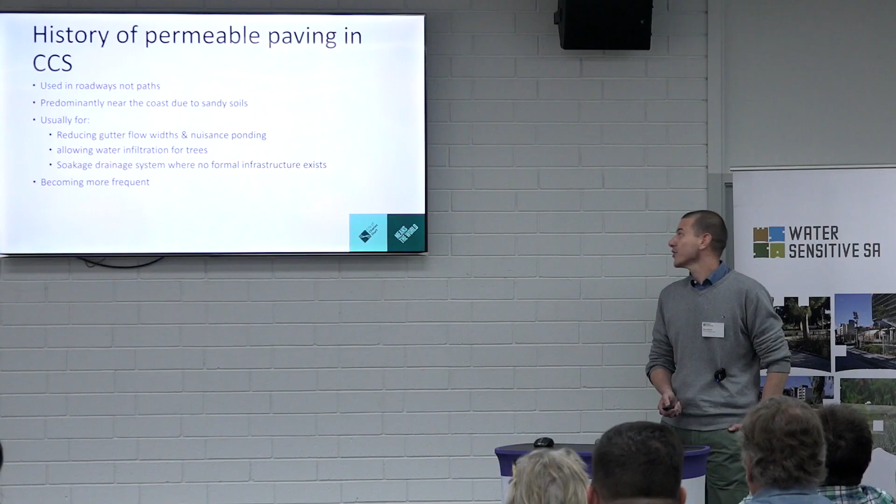I'll give you a brief history of permeable paving in Charles Sturt, where we've been using it for quite a while, though not quite the uptake of Mitcham and West Torrens. It's predominantly used in roadways, not too many in footpaths, and usually near the coast due to the sandy soils. Again, the education and the research that's coming out of Mitcham particularly is starting to sway upper levels of the organisation, but originally there's a bit of that fear about reactive soils.

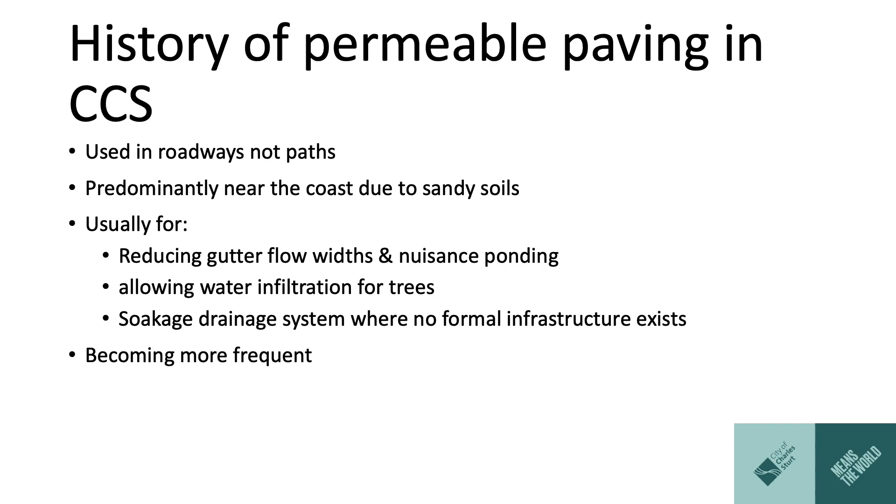It's usually for reducing gutter flow widths, nuisance ponding, maintaining water infiltration for trees when we're formalising laneways or car parks, and soakage systems when formalising laneways where there's no nearby drainage. It is becoming more frequent. We've got about 4 projects next year, some major streetscapes where we're implementing numerous permeable paving treatments, a little bit of a trial, but yeah, just trying to increase the uptake.

So I'll run through a few different examples. This is Kirkcaldy Avenue. This is probably our oldest one. It's about 22 years old, built back in 1999. So this is basically parking bays. The intent was to reduce gutter flow widths and that little bit of ponding in the roadway in smaller rain events without having to extend a stormwater main about 150 metres up the road.

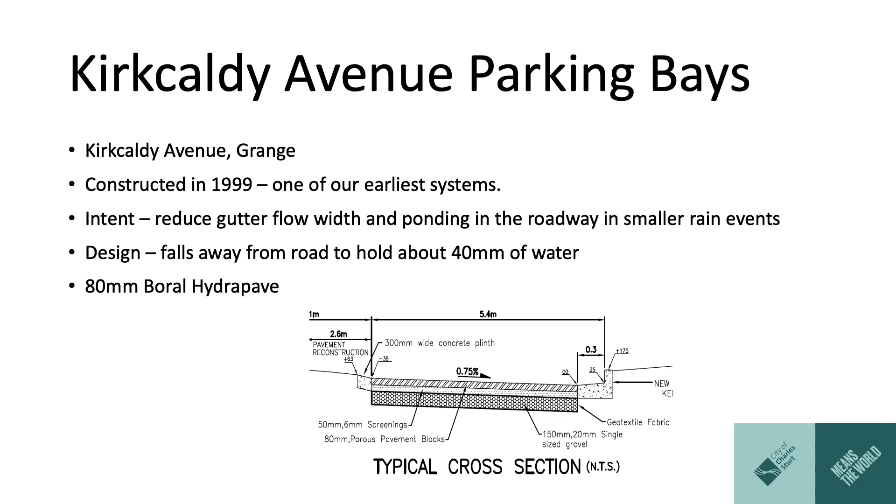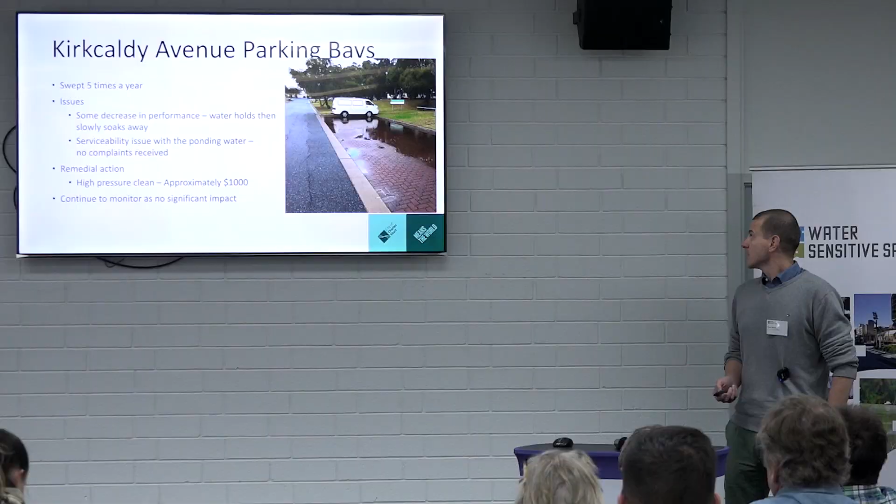The design reflects that. As you can see, it actually falls away from left to right, so away from the road. So it holds about 40 mil of water over the length of the parking bays, and then that slowly soaks in. Any excess in those large rain events carries on down the road. So this is 80 mil Boral Hydrapave on about 150 mil of screenings. For maintenance, it's swept about 5 times a year as part of the general road network.

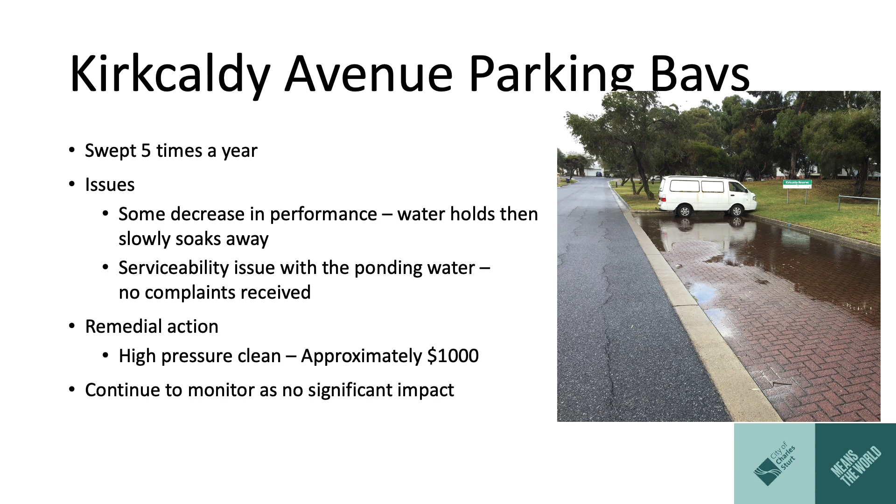Over time, there has been some decrease in performance. Now that's just fairly subjective, based on some council employees noticing a slight difference in how long it takes to soak away. Serviceability-wise, no complaints received, but as you can see in the photo, if someone is parked in the parking bay and it rains, they come back to their car and they do have to contend with about 40 mil of water. So that's something to consider when you're designing these systems: what happens when the water does get held there.

There is a bit of moss build-up in the joints, so we basically just did a high-pressure clean. It's about a day's labour, about $1,000, and we're just continuing to monitor that. So like I said, that's 22 years old, scheduled for renewal in another 10 years, but we'll just monitor it and see what happens.

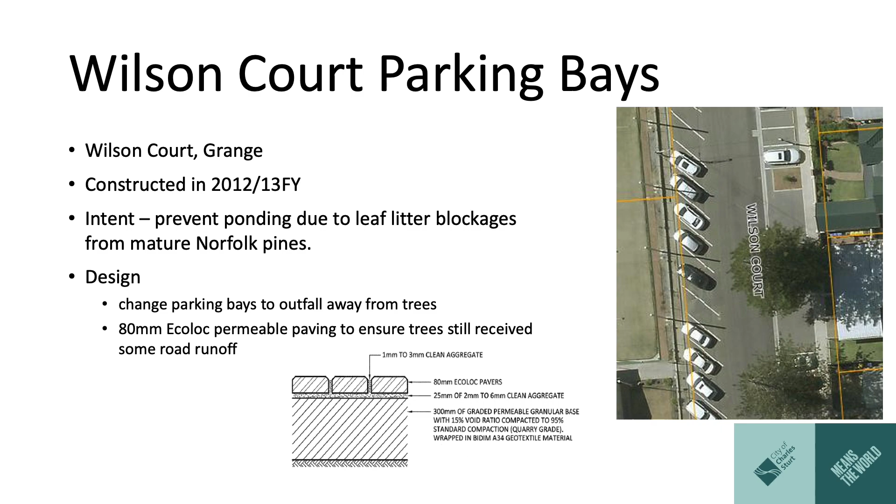Similar thing, Wilson Court. This was constructed in 2012. Basically in the right-hand side of this photo, just along here, is where the curb and gutter previously was. You can see the mature Norfolk pine trees there. With the amount of leaf litter they dropped, there was a lot of blockage of that curb and gutter. So we actually changed it to an outfall. That now falls away to the road, and you can see the new spoon drain just next to Wilson Court there. And we went with permeable to maintain the water infiltration around the structural root zone of the trees.

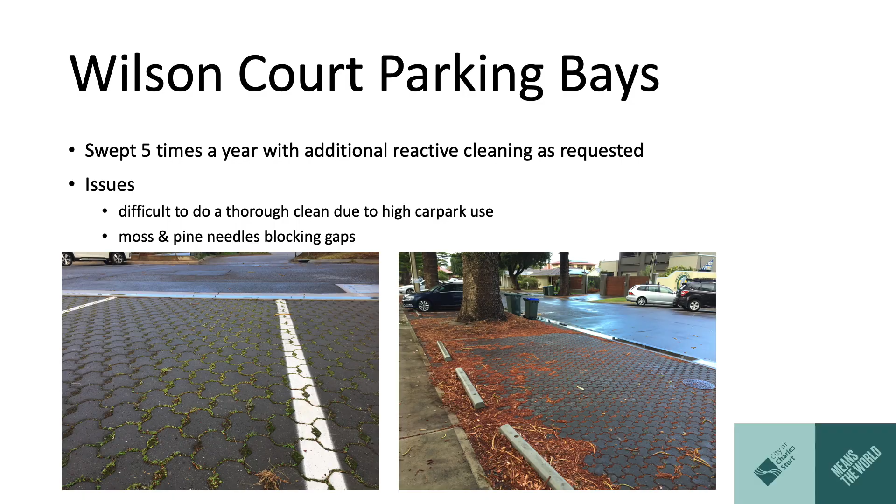They're 80 mil Ecoloc on about 300 mil of screenings, so quite a thick pavement on that one. Again, about 5 times a year sweeping with some additional reactive if people are ringing up. Probably one of the biggest issues we have here is high car park usage at all times. It's next to the bowling club, it's right near a school, so it's busy pretty much all day, every day, not quite 24/7, but very, very busy. So it's very difficult for our street sweeper to get in there and actually do a thorough sweep.

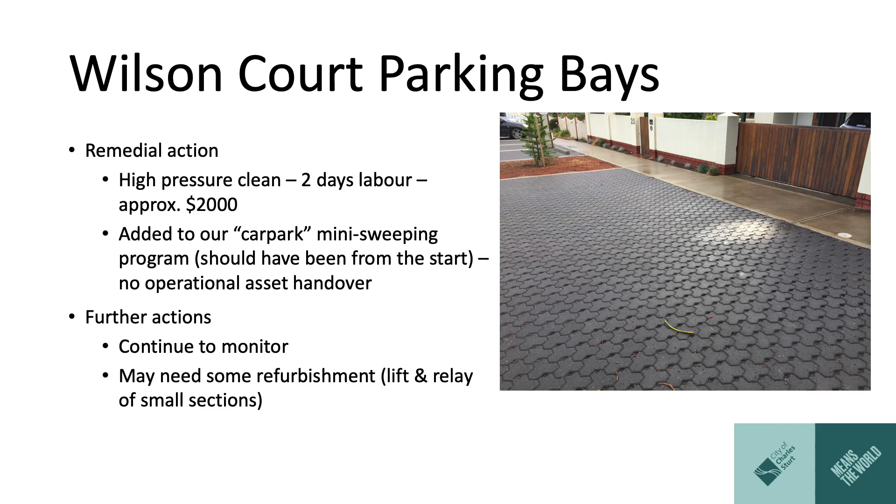There are some areas the residents actually maintain, and you'll see a photo of that soon, but there's moss and a lot of Norfolk pine needles blocking up the gaps just because we can't get in there with the sweeper. So again, we high-pressure cleaned it out. Due to the extent, it was about 2 days. We've added it to our car park mini sweeping program. It should have been from the start, but it didn't get handed over to operations as it should, so there's a learning there. And we just continue to monitor it.

And we've actually had to replace one of the Norfolk pines that collapsed in some wind, so that's a new one there, and it'll benefit and grow quite rapidly. So we'll continue to monitor this, and we may need to do some targeted refurbishment just to lift and relay some sections.

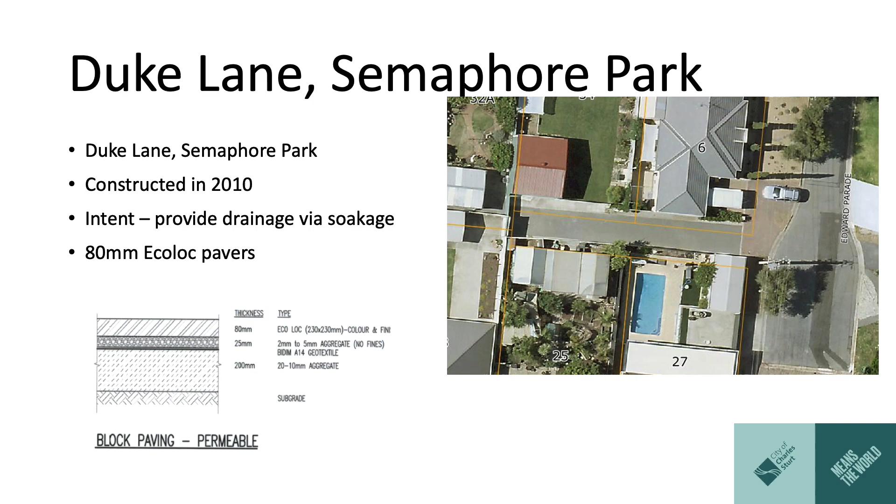Duke Lane, Semaphore Park, 2010. This actually falls away from the right to the left, much like the example that Andrew used. There's no formal drainage within about 300 metres of this. Stormwater from the houses is discharging to the laneway. So the intent here is purely just to provide drainage via soakage. This one is not maintained at all. No one has swept it, looked at it, touched it since 2010.

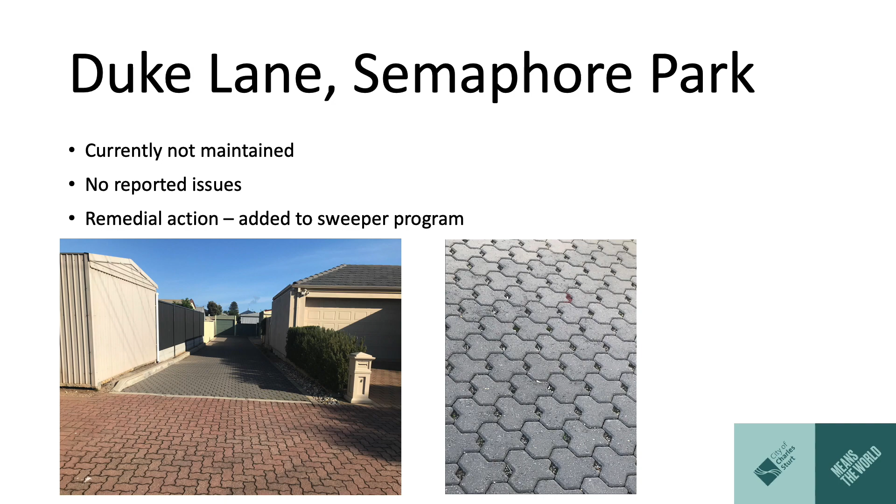Again, asset handover is key. So when we actually went out there and had a look, there were no reported issues, and it is, as you can see in that photo there, functioning fantastically. There's a little bit of moss, but not much. We put that down to there being no overhanging trees, and it does get quite a large vehicle volume. There's about 5 or 6 houses down there that are quite frequent with their car usage. So sometimes you don't have to maintain these assets and you do get lucky.

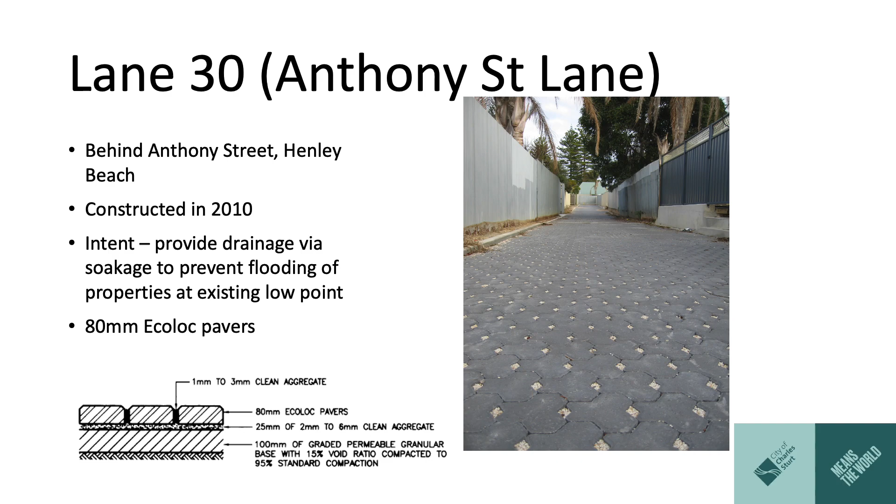Lane 30, Simon's baby. We call it Anthony Street Lane. So this was constructed in 2010. Again, provide drainage for a 1 in 5 event via soakage to prevent flooding of several properties down there. It's 80mm Ecoloc and quite a shallow pavement grading, as you can see. It's a laneway, not a high traffic load, this one.

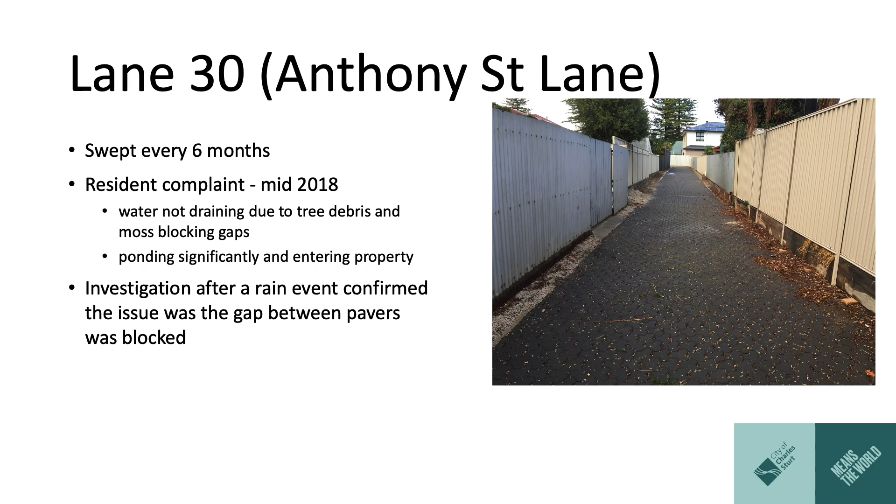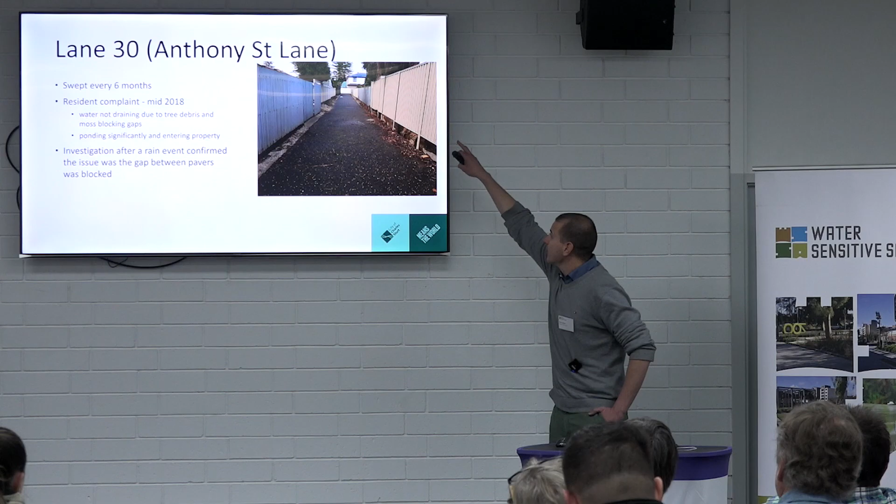That's what it looked like shortly after construction, nice and pristine. Swept every 6 months. Received a resident complaint in mid-2018 that the rear of their yard was being flooded because their water wasn't draining away at the low point, and they suspected it was due to the blockage that you can just see there. There's quite a few large trees that were dropping a lot of leaf litter, including the fine little nuts that were getting into the gaps.

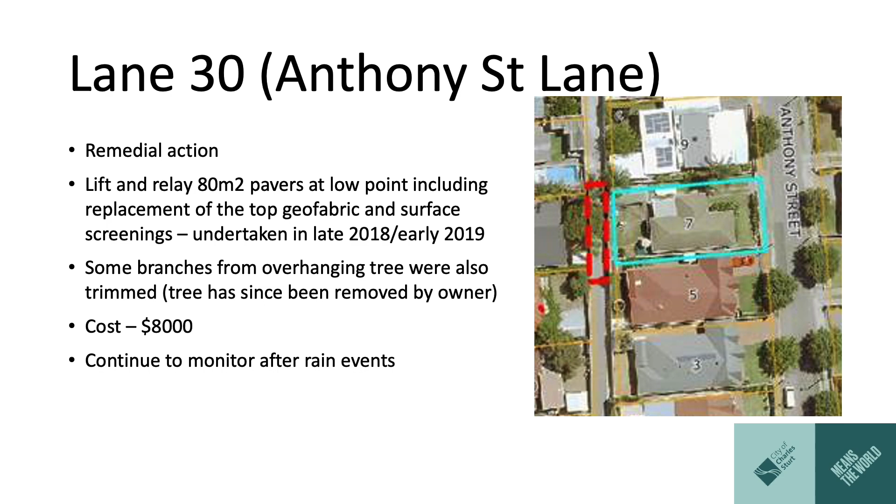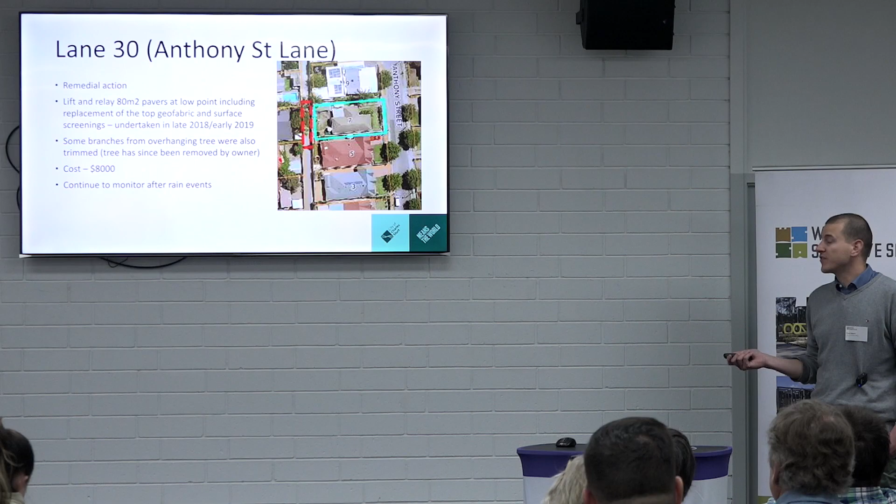Does have the Geofab, so we kept that. Now we know we don't need it, particularly in an environment like this. Over the Geofab, the surface of the 6mm fine filter layer, and trimmed some of the overhanging branches. That tree's since been removed by the owner. That was about $8,000, so it's about $100 a square metre. Probably would have been a little bit less if we had a larger area, but with that small area, you have those costs. We've continued to monitor that, and we haven't had any further issues.

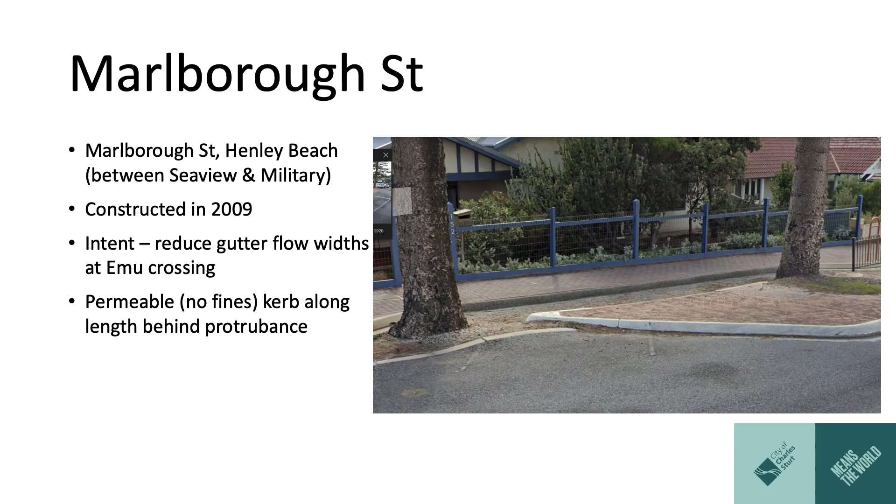Now this isn't permeable paving, but it is something you might consider instead of interlocking pavers. So this is Marlborough Street. It's between Seaview and Military. For those of you who aren't familiar, it collects a lot of water off of Seaview and then falls down to Military Road. We had some quite extreme gutter widths here, about 3 to 4 metres in some fairly minor rain events. So this was constructed in 2009. This is actually the start of an emu crossing there, so when you've got kids and elderly using that, you don't want extreme gutter flow.

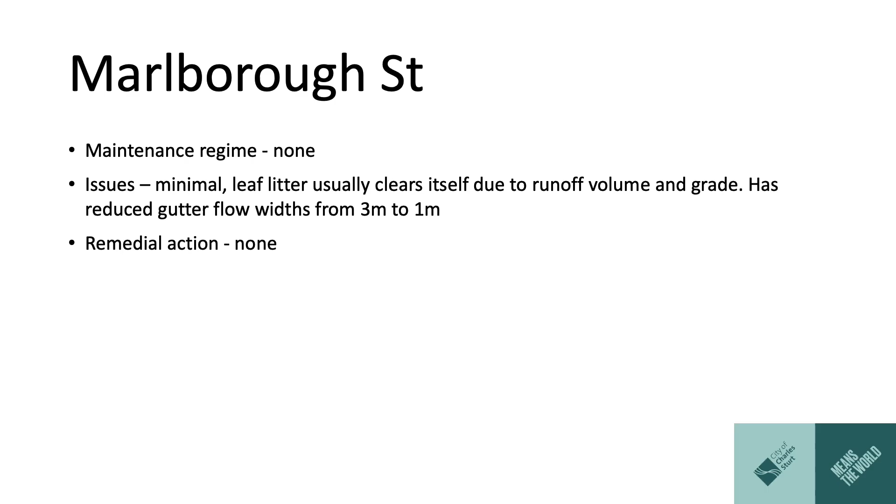So this is permeable curb, no fines curb, constructed the length of the protuberance, and you can see you've got some Norfolk pines there as well. Again, this one, no maintenance. I don't have a recent photo of it, but because of the grade and the runoff volume that it gets, it's very self-cleansing in a rain event, so quite fortunate. And gutter flows are down to about 1 metre there as opposed to 3 metres. So no action taken on that one, but sometimes you do luck out.

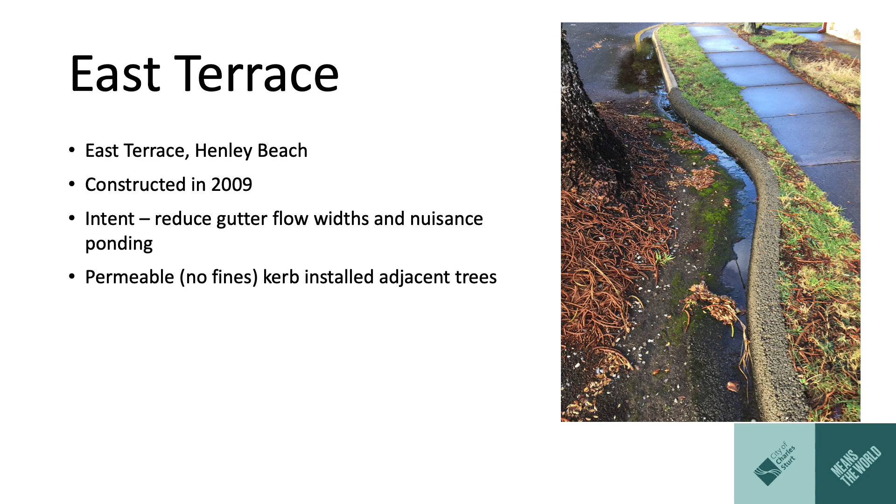This is just around the corner in East Terrace. So again, 2009, the intent was to reduce gutter flows and nuisance ponding. This time, due to concerns over trafficability of the no fines curb, it was only installed adjacent to the trees, as you can see. This one's had quite a few issues. It's swept 5 times a year and sometimes some additional sweeping.

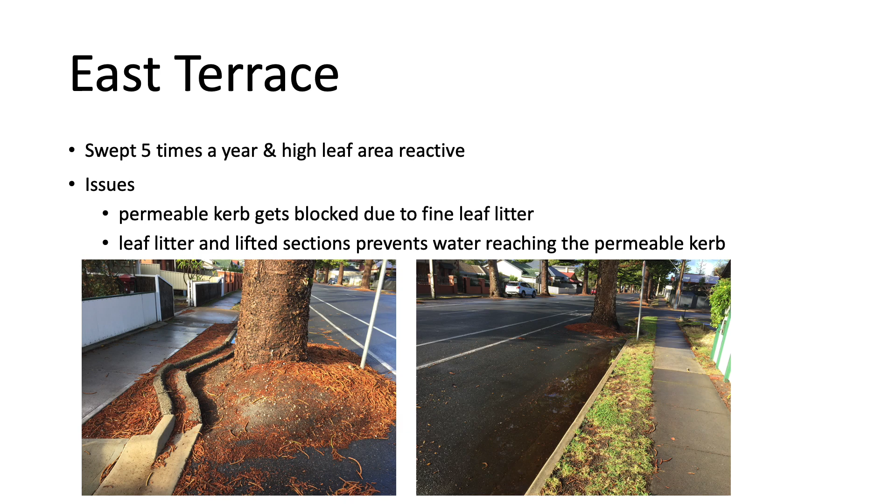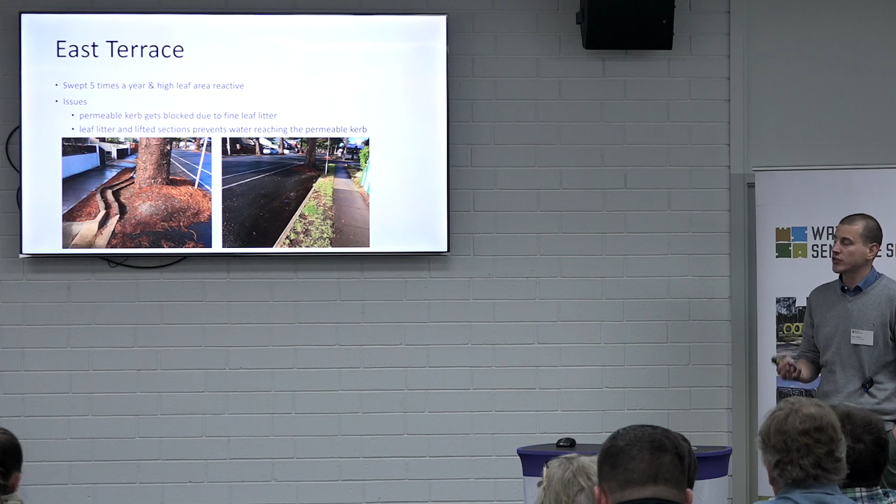We've had the permeable curb get blocked due to the Norfolk pine leaf litter breaking down, but also the leaf litter falls where the trees are, which is where the permeable curb is, and then the water can't actually reach the permeable curb. So it hasn't done what was intended, as you can see in the right-hand photo. And in the left, because of how mature the trees are, and a bit of that construction methodology, some sections have lifted out of the ground.

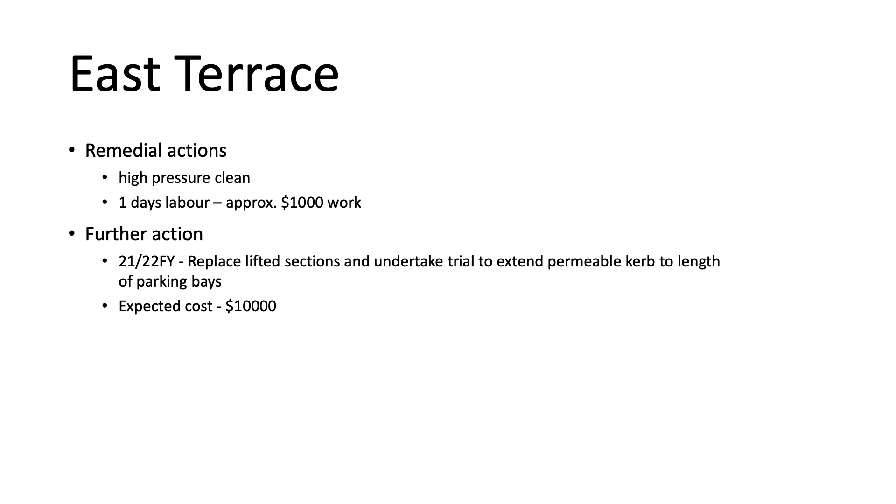So we have previously undertaken some high-pressure cleaning, about a day's work. That was a few years ago. That worked for a little bit. But we are intending next year to replace most of those sections, as well as sections of the kerb in between. So that'll help eliminate that ponding. And we're anticipating about $10,000 for that, and that's about 100 metres worth of curbing that we're going to be doing.

So in conclusion, every location is different. You've got to be aware of your site specifics. Emphasis on maintenance. Proper maintenance will minimise your need for going back in there and premature refurbishment or renewal. Regular monitoring, particularly in your first 12 to 24 months through the seasons, to see if your assumptions are correct, but also just how it is responding to the changing environment and the changing seasons.

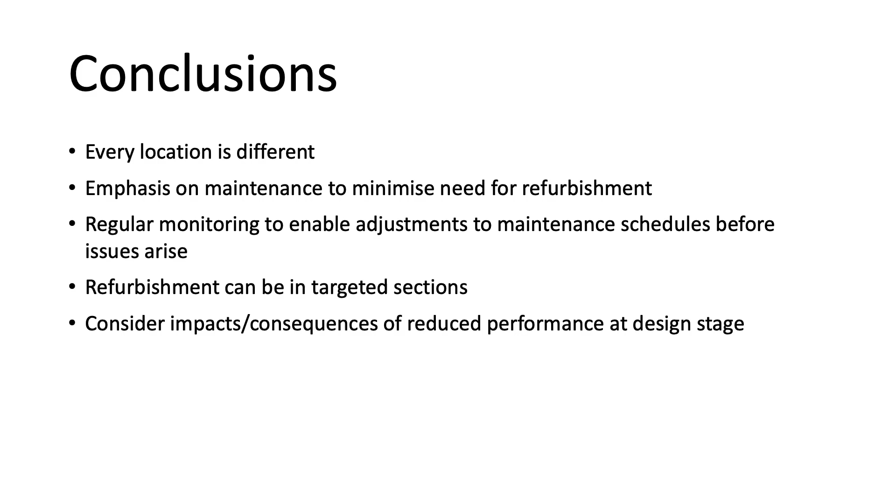And that can enable you to adjust your maintenance schedule with either more sweeping, or you might have to allow for a high pressure clean once a year to try and prevent those issues before they arise. If you do need to do refurbishment, often you can just get away with doing small sections to maximise your impact rather than the whole asset.

And just consider impacts and consequences of reduced performance at the design stage. So like that first car park, if that soakage is no longer working as well as it is, it's always going to hold that 40 mil of water. So that's just something to consider.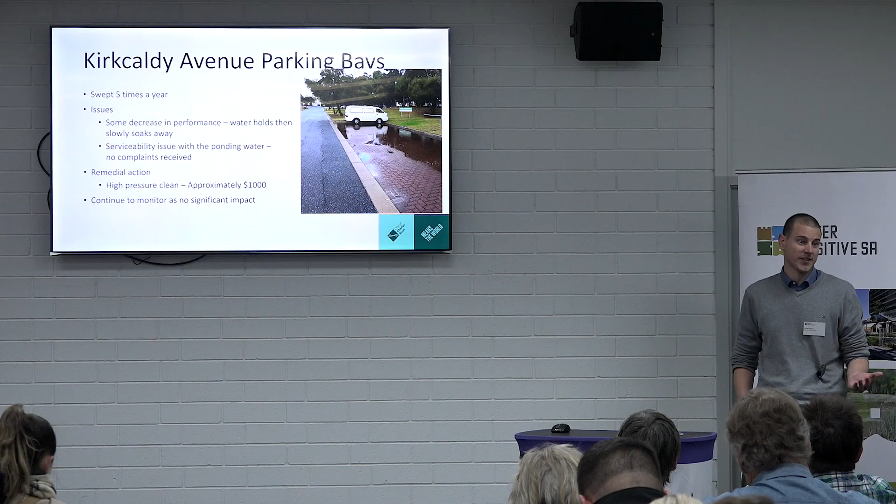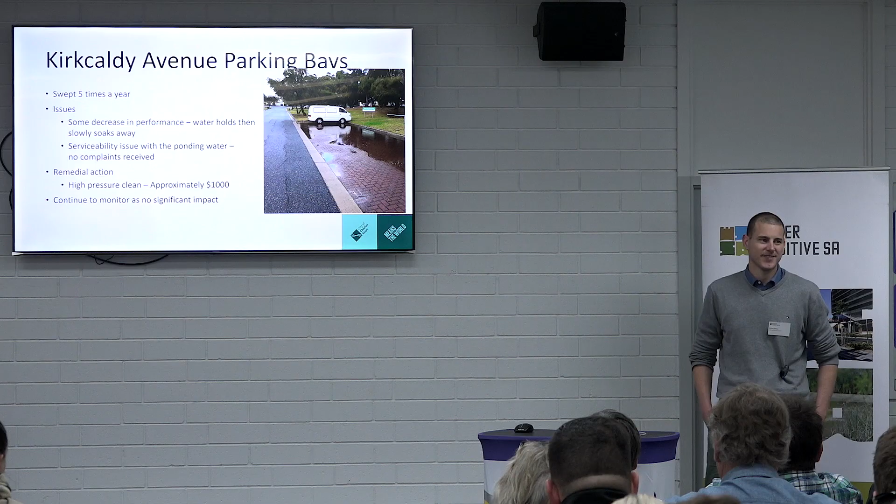But in other times, I'll use Duke Lane. That's had no maintenance, and that's been fine. So that's had nothing for 11 years now, and it's in reasonable, perfectly working, good condition. Whereas other roads have been swept 5 times in that time. Tree roots, obviously, with impervious surfaces, usually tend to do more damage than permeable surfaces. But we'll just have to wait and see with a few of these. But it can be more beneficial. It depends on the context. If you've got a street lined with trees, you need to maintain it. There's no reason for no trees, just for the record.

If I can just add to the answer to that question, particularly with the footpath conversation, does it have hard numbers against it? No. But particularly in the footpath conversation, and this is what we've convinced our senior executive of, even if it costs twice as much to put a permeable treatment in than the conventional. And one of the things I didn't mention in my presentation is the permeable footpath, we're moving more and more towards new trees, to get that better benefit and advantage over life rather than work around trees that are already causing damage.

But even if it costs twice as much to put in, if we save one footpath replacement over what should be the natural life of that footpath, we've paid for the installation. And in many of those locations, anyone that deals with tree lift of footpath or curb knows that you might have a book life of a footpath of 80 years. I'm not the asset manager. 80 years, about right? Close enough.

You might have a book life of a footpath of 80 years, but particularly if there's some degree of conflict with trees, it's not unreasonable that every 15 years you're going back and replacing that footpath at high cost, because it's patch replacement. If the permeable, particularly in line with new tree establishment, is saving you multiple of those, then over the life cycle costing, which Simon talked about beforehand, and that vision beyond just today, you're actually starting to save big bucks.